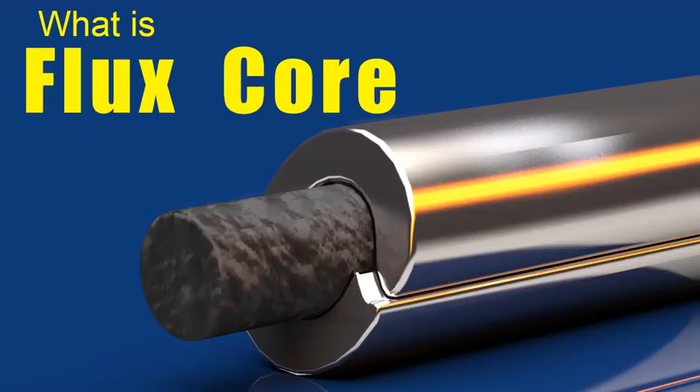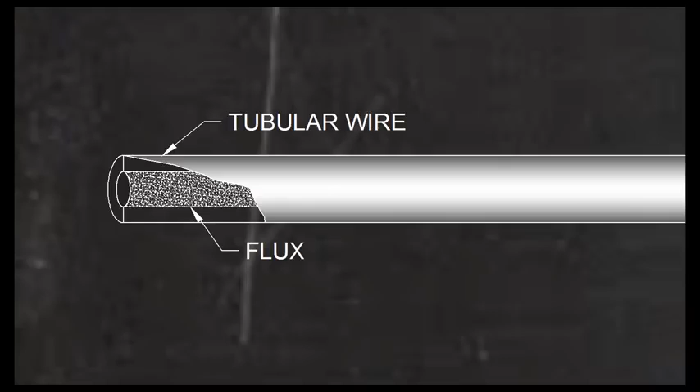What is flux core welding? Flux core is an arc welding process that uses a tubular wire electrode with a flux-filled inner core. The American Welding Society calls this process flux cored arc welding, or FCAW.

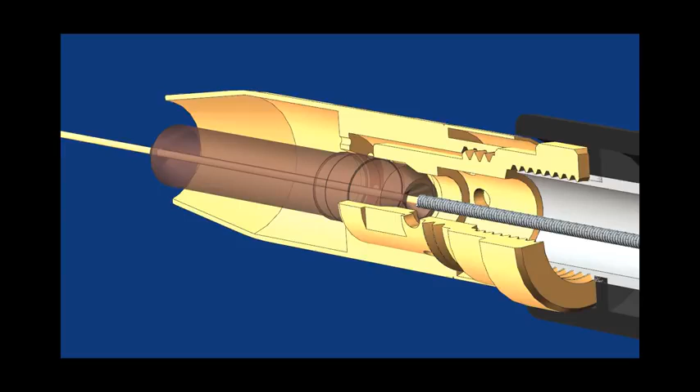All flux core welding is done on equipment that is similar to, and sometimes identical to, the equipment used in MIG or gas metal arc welding. If you're not familiar with MIG welding, you might want to watch our What is MIG Welding video before continuing. But you should understand that flux core welding has some important differences from MIG welding.

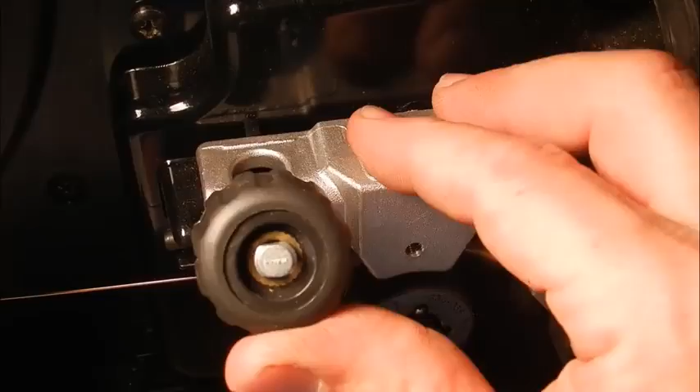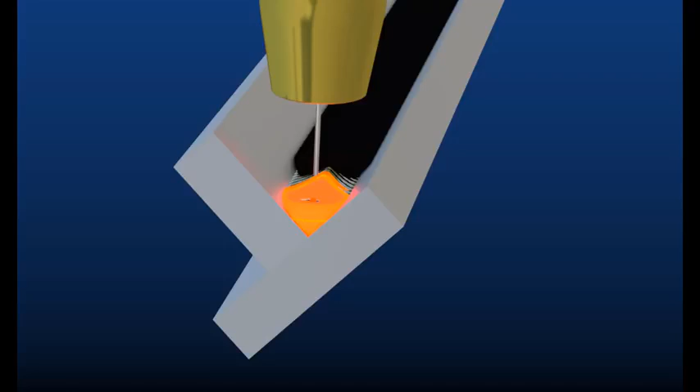In flux core welding, the wire electrode is fed through a wire feed unit. Usually, this wire feeder requires knurled rollers that can grip the tubular wire without flattening or damaging it. As in MIG welding, an electric arc forms between this wire electrode and the workpiece. This arc heats both metals above their melting point. These metals mix together or coalesce and solidify to join the workpieces into a single piece.

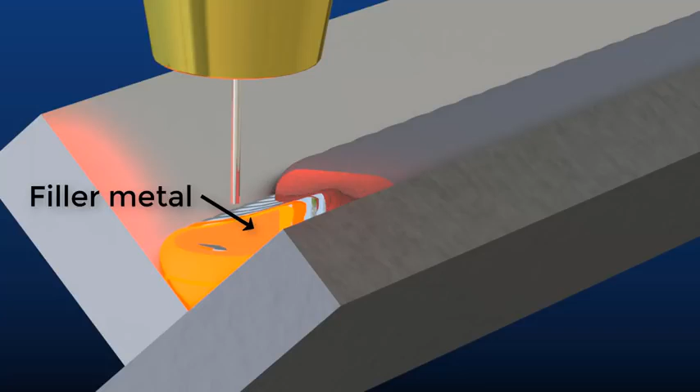The metal in the parts to be joined is called the base metal, and the metal that comes from the melting wire electrode is called filler metal. Because the wire electrode melts as it's being used, flux core is called a consumable electrode process. Flux core welding always adds filler metal to the joint.

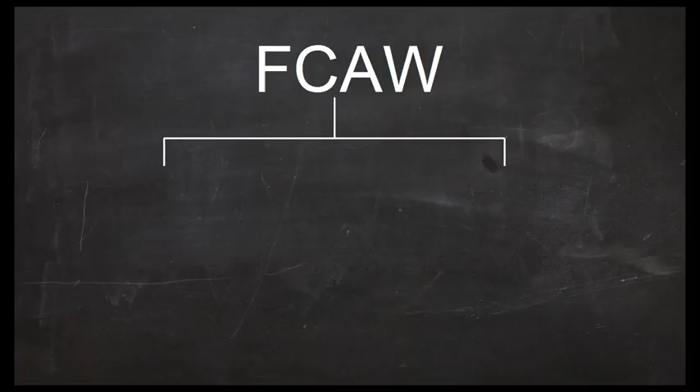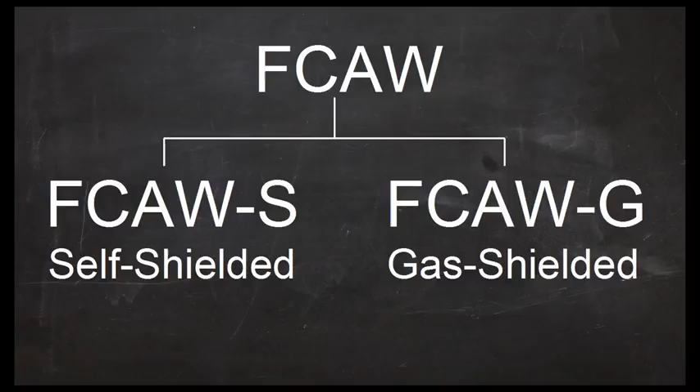The job of the flux inside the electrode depends on which type of flux core process it was designed for. There are two main types of flux core arc welding: self-shielded, known as FCAW-S, and gas-shielded, known as FCAW-G. You need to be sure you're using the wire in the way it was designed to be used, because the chemistry behind these two processes is different.

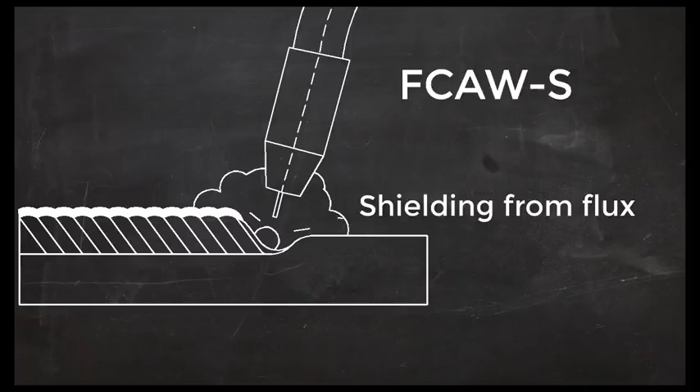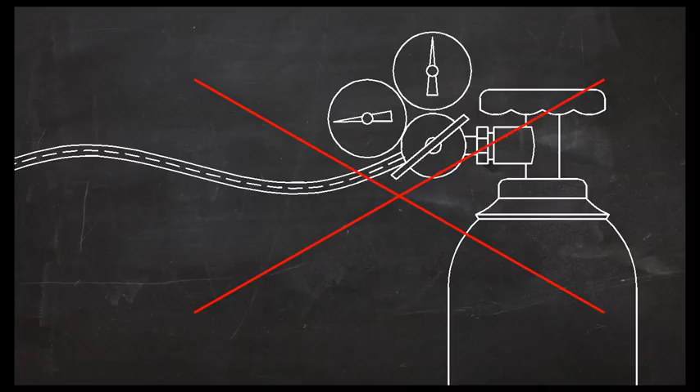Flux-cored electrodes designed to be self-shielded contain a flux that completely protects the molten weld pool. The flux in these electrodes creates a protective cloud that prevents gases like nitrogen and oxygen from reacting with the hot metal. One advantage of the self-shielded flux core process is that the added cost and inconvenience of gas shielding equipment is eliminated. Also, self-shielded electrodes are less sensitive to drafts and breezes that easily contaminate gas-shielded processes like MIG welding. This can be a real advantage in some applications.

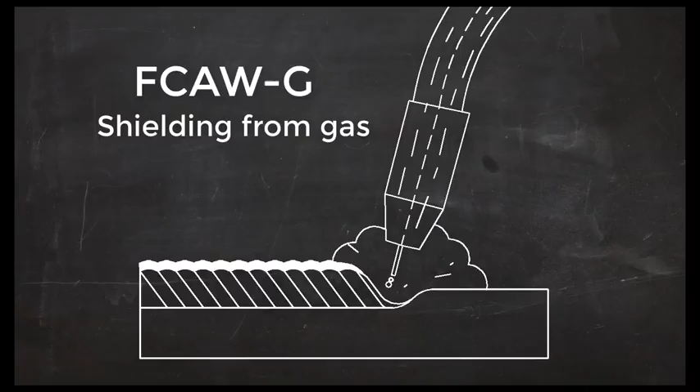Electrodes designed to be gas-shielded rely on a secondary shielding gas to protect the molten weld. The high-pressure gas cylinders used for this process are of the same design as those used in MIG or TIG welding. These cylinders contain gas under extremely high pressure, and a device called a regulator brings the gas to a usable pressure. One of the most common gases used to shield flux core is pure CO2.

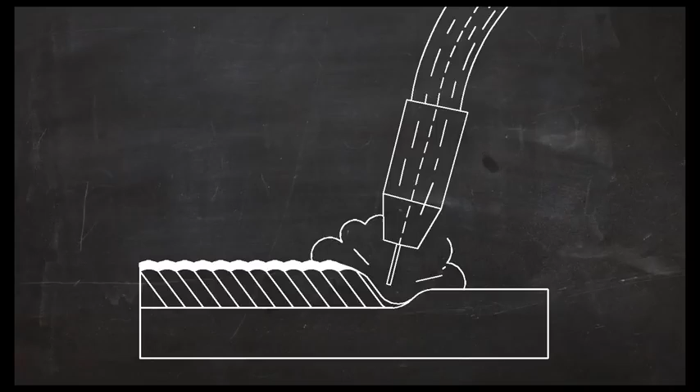Other gases, such as CO2-argon blends, are also used. But one advantage of flux core G is that low-cost CO2 can be used to shield the weld. Another benefit of gas-shielded flux core is the high deposition rate that can be achieved with the combination of flux and gas. Gas-shielded flux core has the ability to lay down metal at an extremely fast rate.

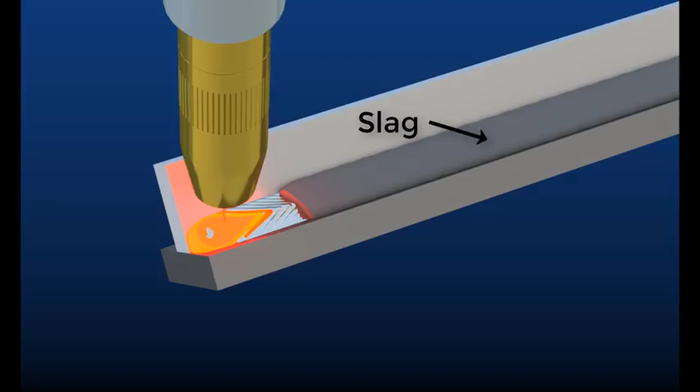In both the self-shielded and gas-shielded processes, the flux forms a thin layer of slag that protects the weld as it cools. This slag also helps the solidifying weld take a consistent, low-profile shape.

In flux core welding, all of the machine controls are set on the machine itself. The most important of these are polarity, wire speed, and voltage. The trigger on the gun is just an on-off switch.

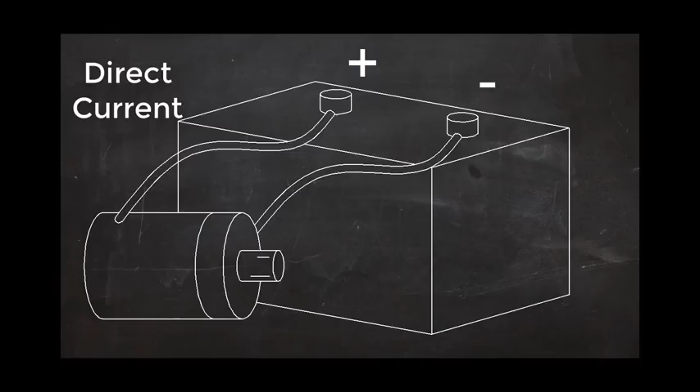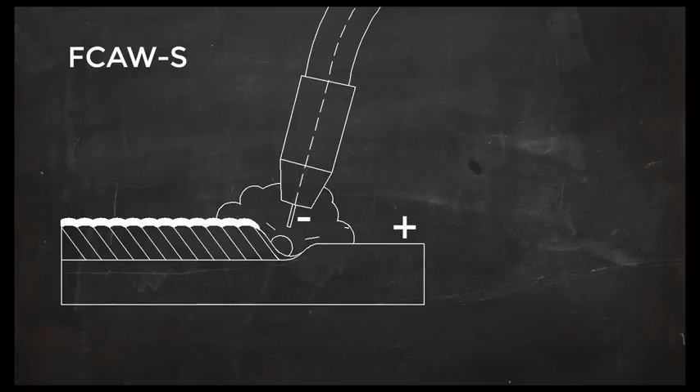For most flux core welding, the current is direct current, or DC. DC is like the current flowing from a car battery. One wire is always negative and one is always positive. In self-shielded flux core welding, the electrode is usually negative and the workpiece is positive. The term DCEN is used for this, indicating that the current is DC and the electrode is negative. You might also hear this called straight polarity.

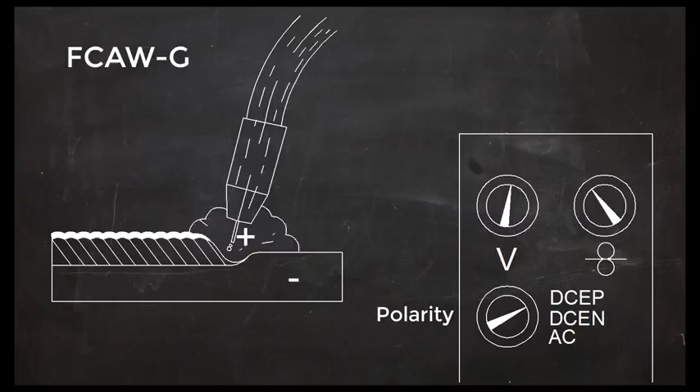In gas-shielded flux core welding, the electrode is usually positive and the workpiece negative. The term for this is DCEP, indicating that the current is DC and the electrode is positive. This is also called reverse polarity, but DCEP is a more descriptive term. Keep in mind that these are the most common settings, and always check your manufacturer's recommendations.

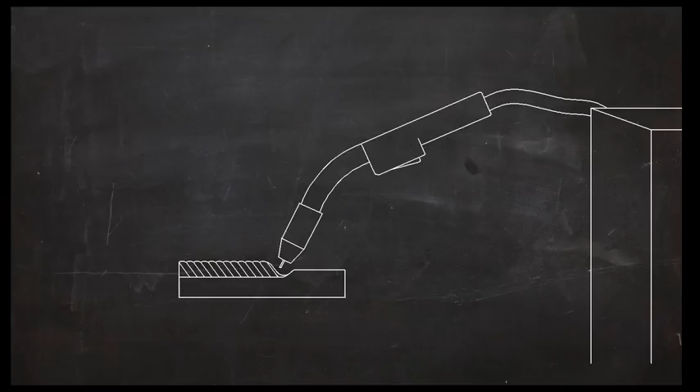In an electric circuit, the current flows in a loop. In flux core welding, the current has to flow in a complete circle from the machine to the gun, into the work, and back to the machine. A work lead is clamped to the work to complete the circuit from the workpiece back to the machine.

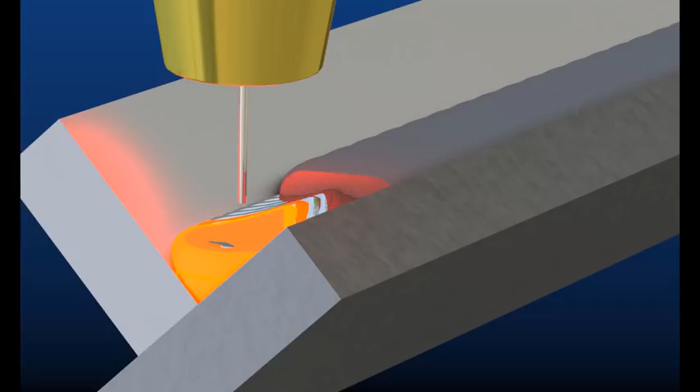So in summary, flux core is an electric arc welding process. It uses a consumable tubular wire electrode that contains flux material on the inside of it. Filler material is added to the weld automatically as the wire electrode melts. In self-shielded flux core, the weld is protected by the flux itself. And in gas-shielded flux core, the shielding gas comes from a high-pressure cylinder.